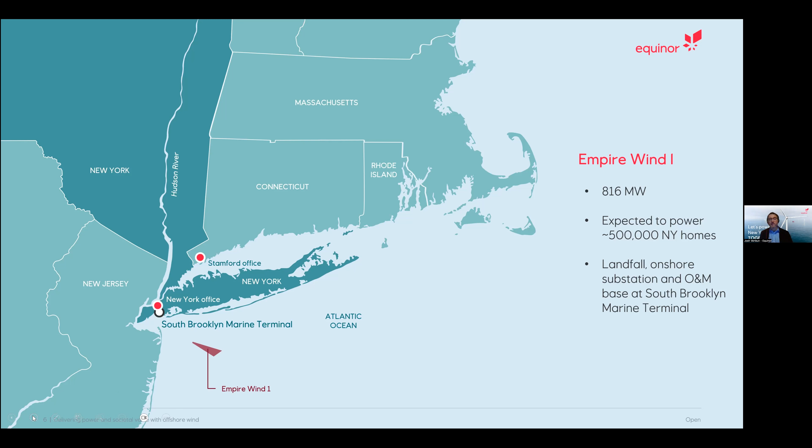Landfall from the... could we go back one slide? Yep. So landfall, once that power is generated out in our offshore lease area, will be funneled through export cables, which will be buried in the sea floor, which I will speak about on the next slide. But it will make landfall at the South Brooklyn Marine Terminal in Sunset Park.

So this overview shows all of the various components of the wind farm. We have the wind turbine generators that will be installed in the lease area that was on the previous slide. The turbines generating power, all of that power will be collected, fed through inter-array cables, which are within the wind farm, and collected in an offshore substation. From there, export cables will bring the power ashore. These cables will start out in the federal waters, be buried beneath the sea floor, transition to New York State waters, about 3 nautical miles off of the coast of New York, and come ashore, where they will come into the onshore substation located in Sunset Park at the South Brooklyn Marine Terminal.

SBMT will house both the substation as well as an offshore wind staging port, where components for the wind turbines will be gathered and prepared to be brought out to the wind farm during construction, and will also house an operations and maintenance base once the wind farm is operational.

From the onshore substation, there are interconnection cables that travel about 0.2 miles through 2nd Avenue in the Sunset Park area, connecting into the broader transmission system within New York City at the Con Edison Gowanus substation, which is also in the Sunset Park area.

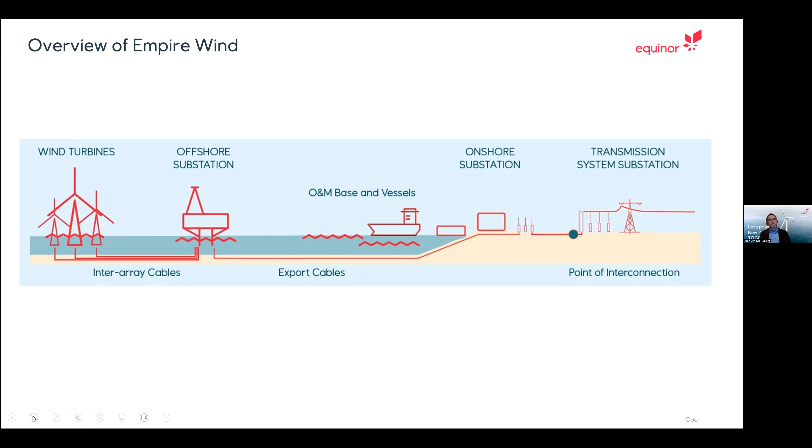From the existing conditions, this slide shows what the port will look like when it has been fully developed, as well as the onshore substation when developed. For context, the substation area, which is the subject of tonight's meeting, is on the lower right-hand side of the diagram, right below where some green areas are depicted to show vegetation.

So we have the substation. Directly to the left of the substation buildings is the operations and maintenance space, which I referenced, and then all of the other equipment is associated with the staging port, which will service both the Empire project as well as future projects, Empire Wind 1, Empire Wind 2, the Beacon project, and will be available for the offshore wind industry as a facility to support this growing industry in the US.

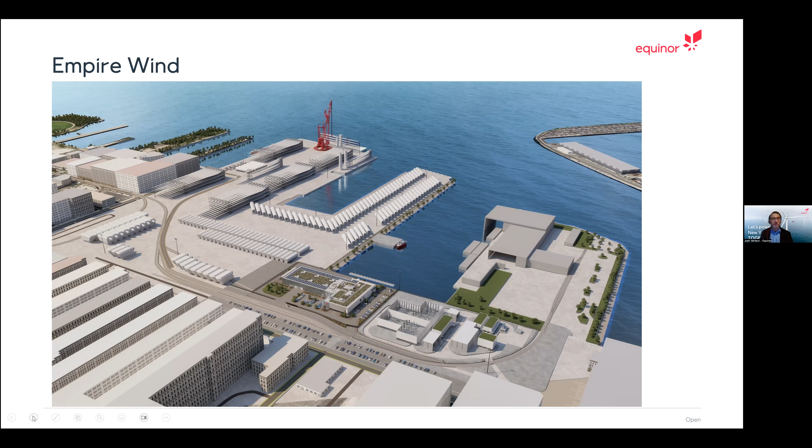That brings us to the conclusion, and I will throw it over to Sean for a discussion of the dewatering SPDES permit.

Thank you, Josh. Thank you, everyone, for joining the meeting. I'm the owner of Tri-State Civil Construction. We are the dewatering contractor for this project. We're going to go over a few slides in the next few minutes, talking particularly about dewatering for this project.

The first slides will go over the overview of the site conditions, some key points, and the next will mainly focus on the permits, particularly what's called the SPDES permits.

Next slides, please. Yep, we are, shoot. Okay. All right, we're back.

I'm sorry, guys. So the SPDES permit is New York State Department of Environmental Conservation. We also call it NYSDEC. For this project, we're going to have 2 phases of dewatering.

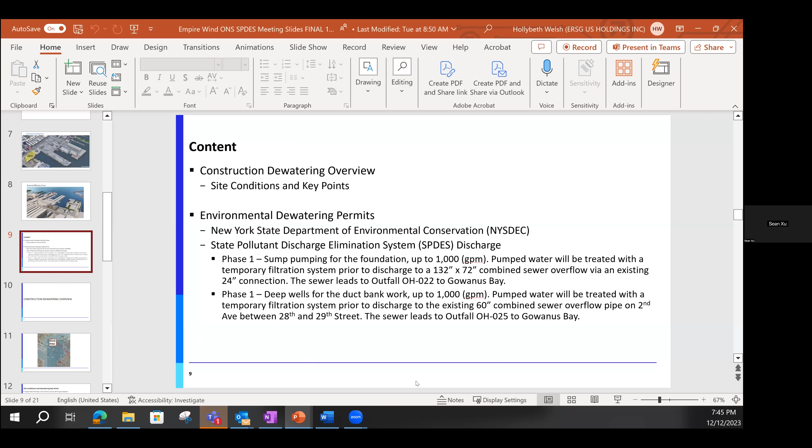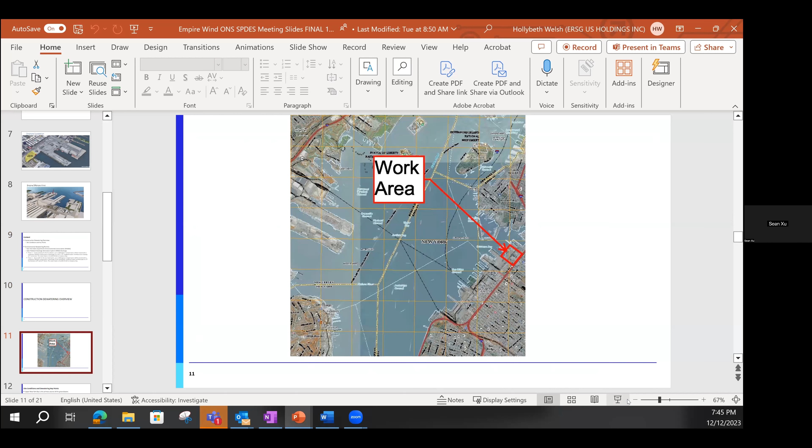Okay, so this is the map showing approximately the work area. As you can see, it's at the South Brooklyn Marine Terminal. Just to give you a little bit of background on the site.

Back in the 1800s, this entire area was still a shoreline. The shoreline was set back at 3rd Avenue. By the 1950s, the shoreline was extended another block to 2nd Avenue. And the entire area has been backfilled with miscellaneous material from unknown sources. So that's the background of the site condition.

And next slide, please. I'm just going to go over these couple points quickly. The water source for this location is the upper New York Bay. Also, we call it here the Gowanus Bay.

So mainly construction, which we briefly touched on a couple slides before, is one is the onshore substation, and the second phase is the duct bank utility trenches. Both excavations have some foundation structures that go below the water table, which requires dewatering. Again, we're going to use a combination of sumps, typically to control shallow water, and we also will install deep wells for the deeper excavations. The estimated peak flow is 1,000 gallons per minute.

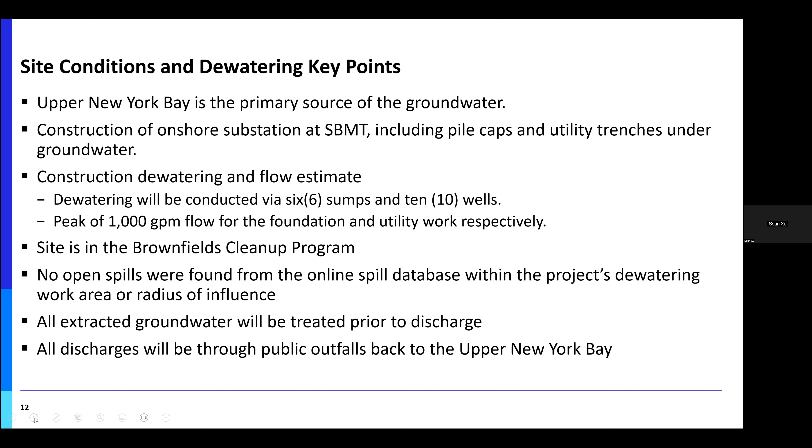Also, the extracted water will be treated like we discussed prior to discharge, and the discharge will go to the public outfalls back to the Gowanus Bay.

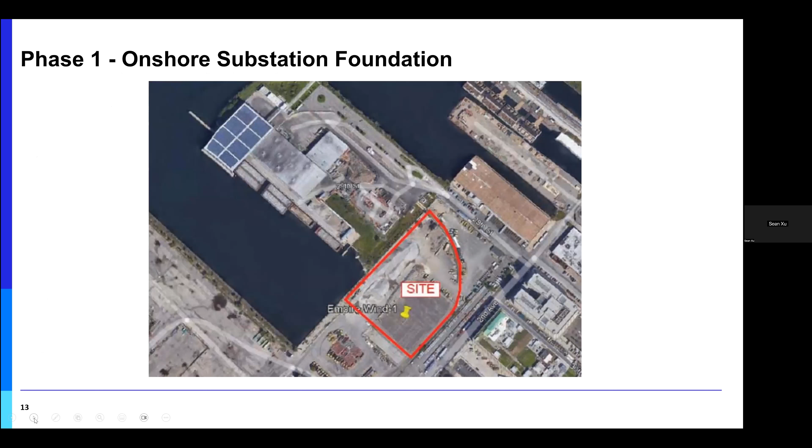This map basically shows the phase 1 area, and it's called the onshore substation, so you get the general idea of the location.

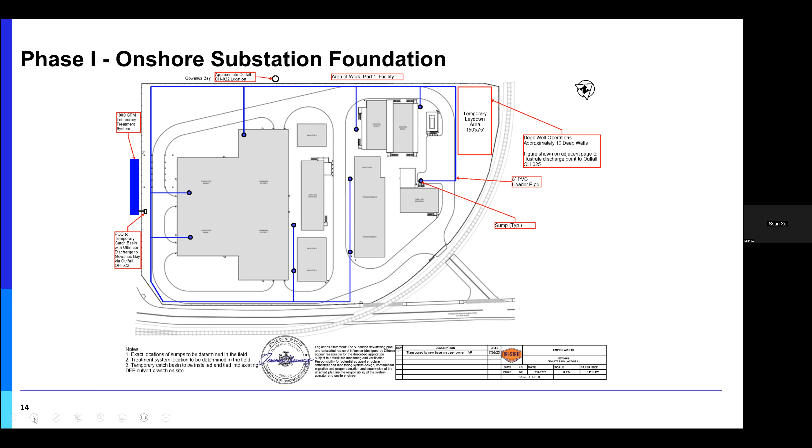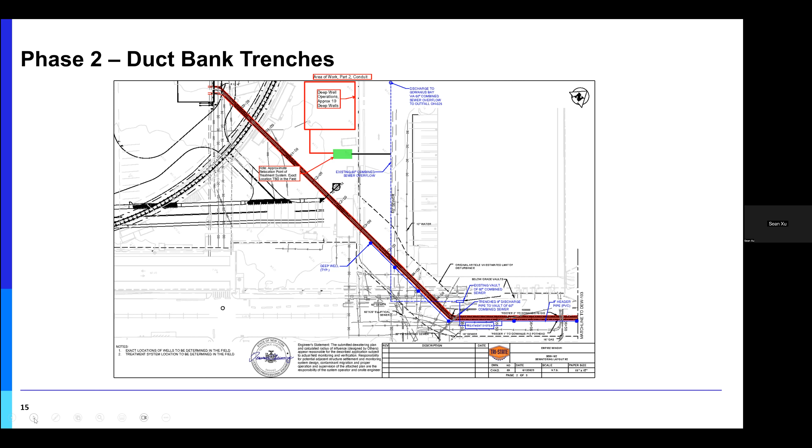This layout shows the phase 2 work. The straight line coming diagonal down to 29th Avenue shows over about 1,000 feet of duct bank work we need to build. Certain sections are going very deep, so we are installing deep well systems to extract the water and lower the water table.

The second permit is controlled by New York City. New York City owns all the public sewers, so after the water is extracted from the ground and treated, we're going to pump it through the New York City owned combined sewer, which leads to the outfalls.

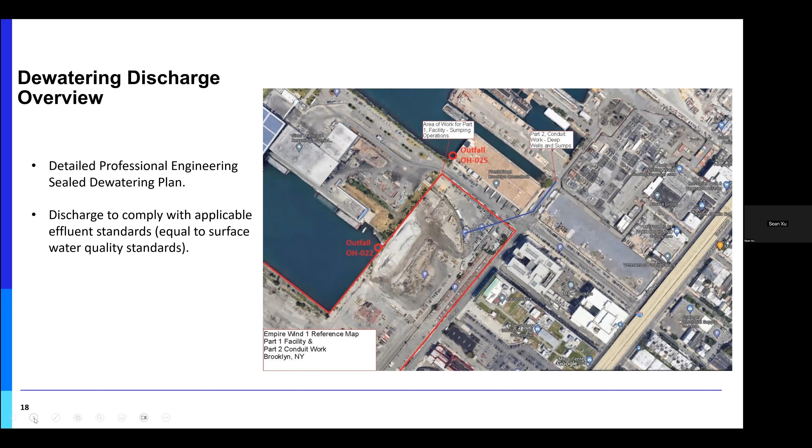Now a little more detail about the SPDES permit and what it covers in the package. After the design is ready, we have to put together an application package and send it to DEC, which contains detailed information about the layouts—where the discharge system is going to be, where the treatment system is going to be, where the water is going to discharge to. We're also going to show 2 500-gallon-per-minute groundwater treatment systems at each discharge location, including details of each component, such as settling tanks, carbon vessels, and filter bag skids. Each component is going to remove certain types of contaminants before we discharge.

And also at the end, we're going to talk about the PPP plan, the public participation plan. We'll discuss the surrounding communities and the impacts, and also the air quality and climate change analysis to be included in the entire package.

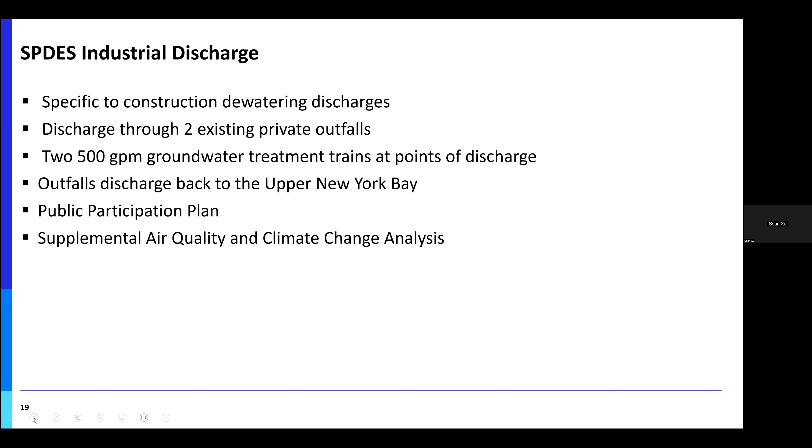Okay, yeah, that's it. Thank you, Sean.